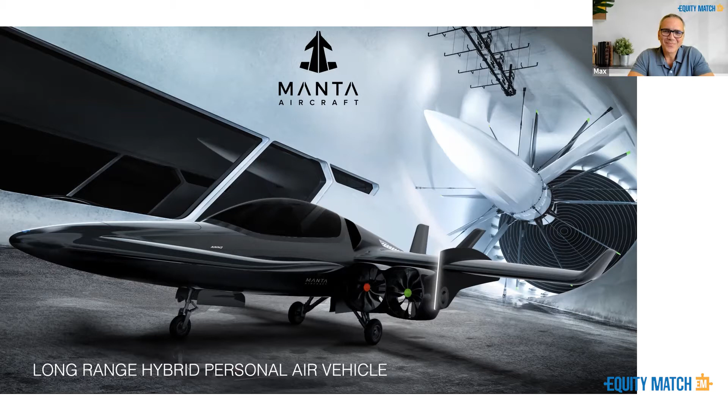Thank you, Lucas. And I don't want to wait and waste even 1 second, so we can start talking about Manta Aircraft. Thanks. So yes, as I was saying, we started from the idea of creating a vehicle for the advanced air mobility. And the advanced air mobility, as you know, it's a new sector.

It's new aviation. The world is changing very fast, and it's bringing the possibility to the people of flying these vehicles or these aircraft that we all have in the back of our mind, because we all have seen the movies of Star Wars, of Fifth Element, of Blade Runner, all these movies where it's possible to start with your own vehicle from the back garden and fly to another place which is right in front of the house of your friend, or go downtown, or go to the seaside and land just close to your place.

So this is becoming a reality. It's very quickly becoming a reality. And this is Manta Aircraft. Manta Aircraft is developing a platform. So we are developing a concept of vehicles like the one that you see on the screen. It's a concept of an aircraft with certain peculiarities that we'll go through now in the presentation.

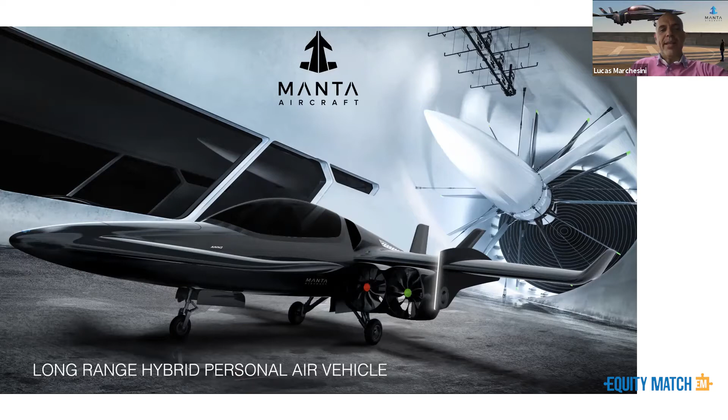So as you might have noticed, the advanced air mobility sector is growing really, really fast. It's enough to say that there are some players which are now valued some billions. Everybody thinks that now this is the sector that can take advantage of the technology that there is around, and put it together and create something really new.

Bring the possibility to fly with this type of vehicle to everyone. So everyone means maybe you will be a passenger. You can fly with this in 2 or 3 years time. You can jump on this and then take off vertically and then land somewhere else very close to your final destination. So the market will be huge.

Every sector analysis says that it's going to grow a lot, and every month that goes by, the sector dimension is estimated to be bigger and bigger. Why? Because there are more and more missions that can be found to be appropriate for these type of vehicles. So these vehicles will be able to do more and more things. The more we develop them, the more we understand how to use them and how practical they can be.

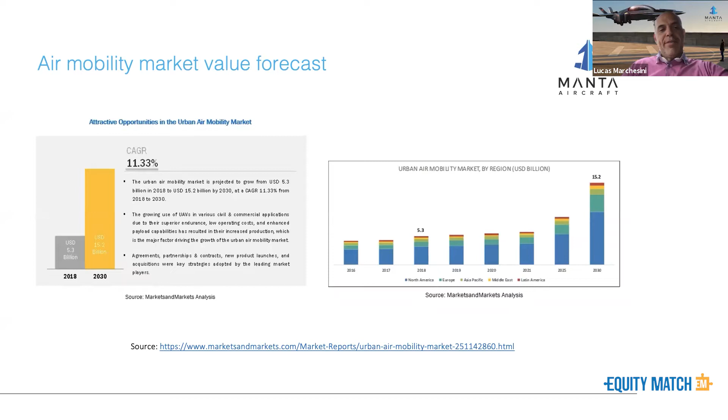There are so many reports saying this, and also quite important people or famous people from aviation are entering this sector. It's enough to say that Muilenburg, the ex-CEO of Boeing, has created a SPAC to acquire an eVTOL company at the beginning of the year.

Tom Enders is now the chairman of the board of directors of Lilium. And Giuseppe Orsi, who was the CEO of AgustaWestland first, which is now most likely the biggest helicopter company in the world, and then he was the CEO of the now called Leonardo, which is the Italian group for aviation, has been caught by Manta, and he has joined Manta.

So what is the design point of Manta? From the beginning, what we decided was to set a certain mission for this vehicle. And the mission is to fly at least 300, better 400 kilometers range, at a speed of 300 kilometers per hour. This is the target we set at the beginning of the design.

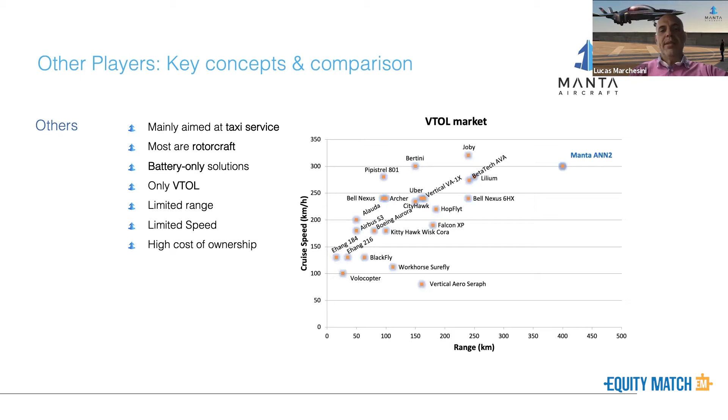Comparing the missions of the other players, Manta has a different mission. It's not better, it's not worse, it's completely different. This range and this speed have implications on the technical solutions that we have adopted.

The solution we have chosen is a hybrid propulsion solution, not battery only. The aircraft is propelled by a gas turbine coupled with a generator, coupled with batteries. The current from these systems is used to power 8 electric motors in the fuselage and under the wings.

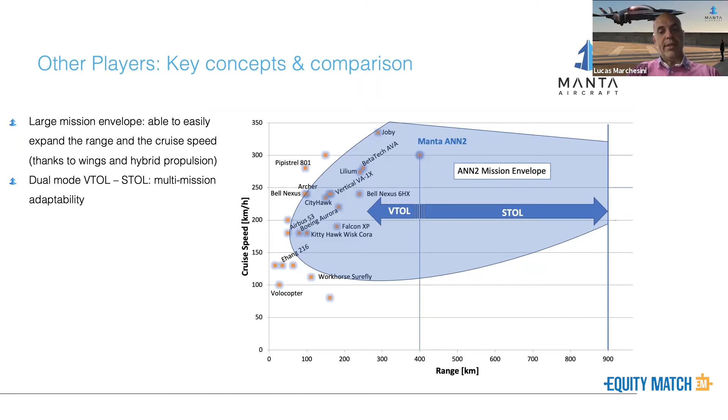With this configuration, the aircraft has a very wide range of operation because it can take off and land vertically, but it can also take off as a normal airplane, increasing a lot the payload. Increasing the payload also means increasing the fuel it can take, expanding a lot the flight envelope or mission envelope of the aircraft. This is illustrated in this graph.

So the aircraft is aimed at fulfilling some missions that today are done by helicopters. The aircraft is not meant to replace helicopters. The Manta vehicles can hover, they are not designed to stay hovering. The helicopter can stay hovering as long as it likes. Manta vehicles are made to take off and land vertically like a helicopter, but then fly like an airplane.

This means they can be used for missions of law enforcement, where you need to perform checks and controls, infrastructure surveillance, offshore transportation, cargo delivery, and so on. This is a typical operation of the aircraft, because it combines the capability of taking off vertically and then flying fast and far away.

In the case of personal transportation, it can be used if you want to fly from one place and land in whatever other place. You can use it instead of a turboprop today, or instead of light helicopters, or for leisure flight, or if you want to set up a limo service, then this is the type of aircraft that might work. We are also developing a 4-seater, more appropriate for this type of service.

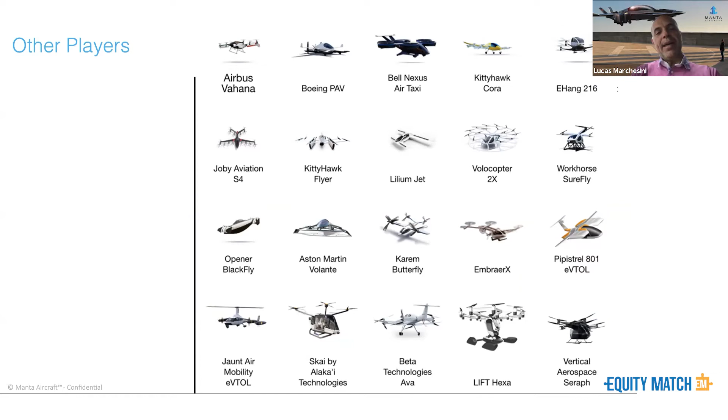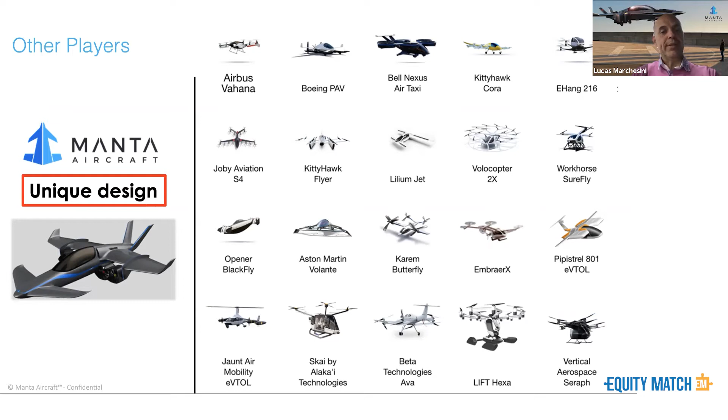This is the panorama, the landscape of some of the other most famous players. Compared to them, the Manta platform has a different design, because as we said, the mission is different. We are targeting a different market — we are not interested in urban air mobility only, but we are targeting regional and inter-regional mobility.

Compared to other initiatives, let's see where we are positioned in terms of status now, or stage of development. We already have a technology demonstrator. It flew in December 2020, a 1/3 scale model, and it has hovered. It still hasn't done the conversion from hovering to horizontal flight.

That's something we have been studying in the simulator, and before doing the real test, we do a lot of simulation and simulator hours. So the whole development is based on simulation and computer aided design.

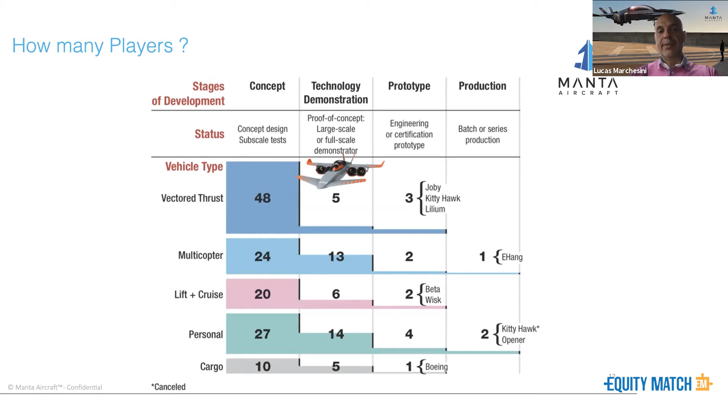And what is the market? You might wonder what's the market — it's not just police missions or transportation of individuals. Well, the market is quite wide. For this type of aircraft, we have seen an interesting market, especially in the US, the biggest aircraft market in the world. Those aircraft which are piston airplanes or turboprop airplanes very often do missions that can be taken over by the Manta platform.

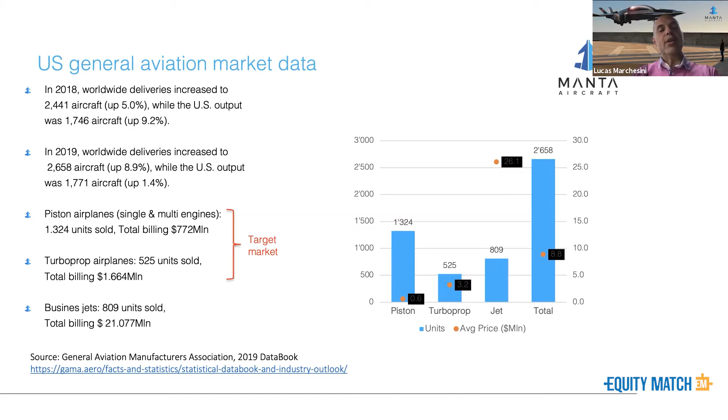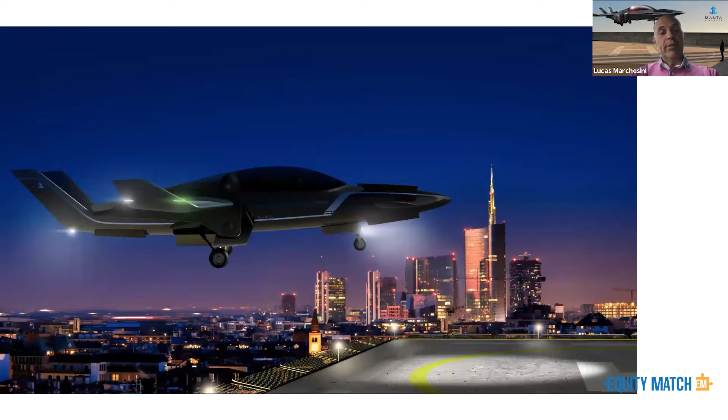So this is the Manta proposal at the end: something that fulfills your wish or your need to move and fly 200 or 300 kilometers or more, depending on the amount of fuel that you want to put on board.

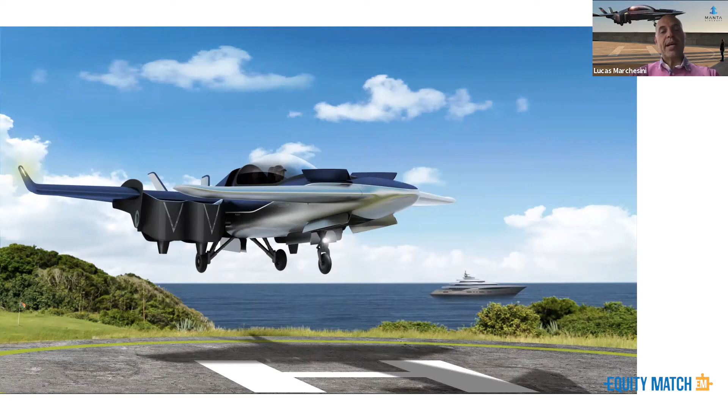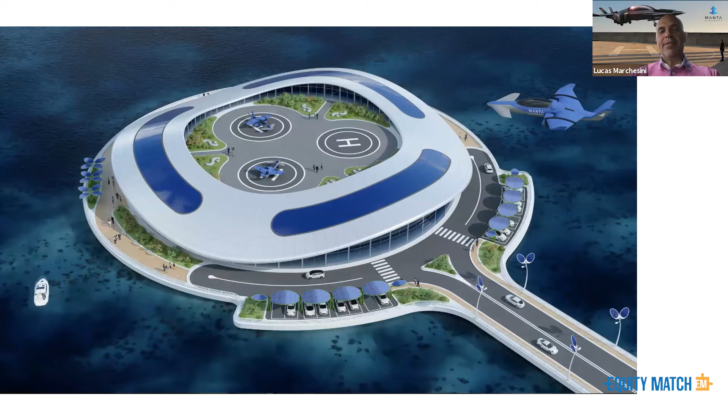So these are some use cases. You can use it to go to the seaside, to the beach house, or it's also designed to be capable of taking off and landing from yachts, and landing close to your place. Interiors are at the level expected for an aircraft used for private flights. And there are already ideas about creating vertiports for this type of aircraft.

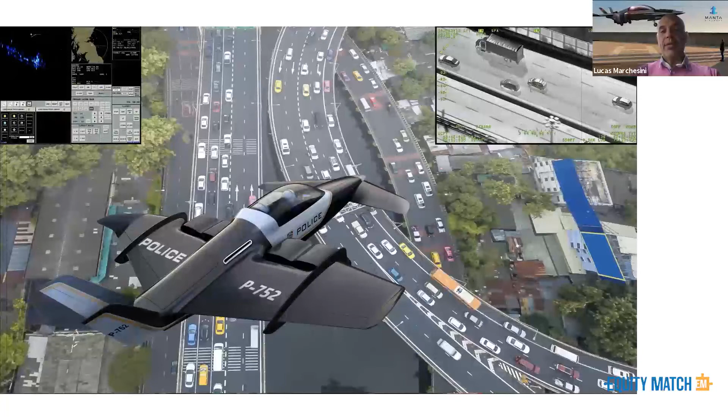But as we mentioned before, it can be used for rapid intervention in case of disaster, in case of medical emergency. It can be used for patrolling. It can be equipped also with sensors. So we are designing the aircraft with the capability of taking on board different types of sensors, which can be used for terrain mapping, surveillance, and so on.

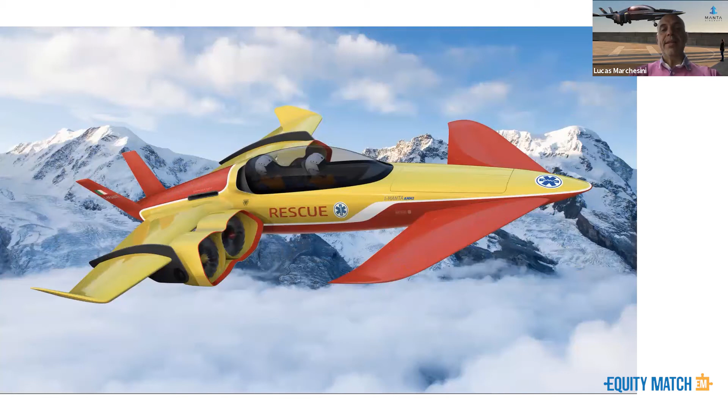And it can be used also for searching, when somebody is missing, or when there is an emergency and an aircraft that is not so expensive to operate can go and search for something. And this is an important aspect, the cost of operation of these aircraft.

Because when we are thinking about an aircraft for passenger transport and travel, we think of a helicopter or an airplane. Forget about airplane jets, which are in a different category. But think about the helicopter, which takes off and lands vertically. The helicopter has a quite important hourly cost and total ownership cost, which is very high. With this aircraft, we are targeting an hourly cost between $200 and $300 per hour.

This means that the cost compared to a helicopter is about one tenth. And this is a big difference. So also using the aircraft for police missions, for search and rescue, for fire control service, for ambulance, this means the cost of the service is much lower than with a helicopter. And this is a big push, obviously.

So which are the main characteristics of this platform? First of all, as we said, it's a hybrid electric propulsion system. There is a gas turbine behind the pilots. The gas turbine in the future can be replaced by a hydrogen engine, or it can be replaced by batteries. There is a whole compartment that can be filled in with batteries.

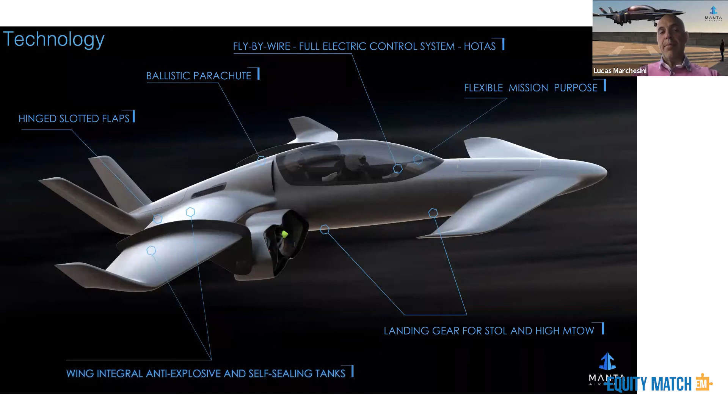And it has the wing tanks for the fuel. They are big wing tanks. So if you want to fly far away, you can fill the tanks, and we have a lot of fuel that can be stored in the wings.

So Manta is developing this platform that can take the shape of a two-seater, a four-seater, or a cargo. It's quite flexible, but at the basis of this, there are four pillars, what we call the technology pillars, that we are focused on. The first one is the design, which is registered.

Then we have the propulsion system, hybrid propulsion system. We are developing a system that will be adaptable to other machines as well, so it could be installed on other machines. This means we are creating an asset that is valuable by itself, which does not need to be linked to the rest of the project. This is also a peculiarity of the Manta approach.

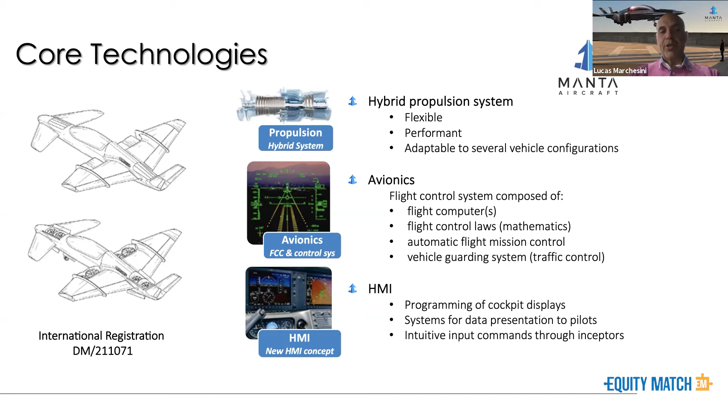Then we have the avionics. So obviously all the flight controls and flight control laws of the aircraft are developed in-house, and they are tuned for these type of vehicles. And then the human-machine interface, meant to be quite easy and user-friendly, so it will be better for the pilots, who will have the possibility to fly these aircraft more easily.

So at the end, it's a multi-purpose platform. It's engineered as a platform with a modular approach, as much as possible, so that we can reconfigure it and upgrade it.

This is meant to offer a longer life cycle. The hybrid propulsion system grants longer endurance and range, with no need for electric recharge infrastructure. This is a big problem for vehicles which only have batteries—they need a recharge station and recharge infrastructure. This type of solution with the hybrid propulsion system does not need ground infrastructure.

You can land close to a fuel station, just fill the tank with diesel, and take off—you don't care about recharging the batteries. The batteries are automatically recharged by the gas turbine. So there's no need for stopping the vehicle to recharge batteries, and no high cost of battery replacement. The batteries are smaller, and we have batteries which last many cycles. This is a new type of battery with this characteristic.

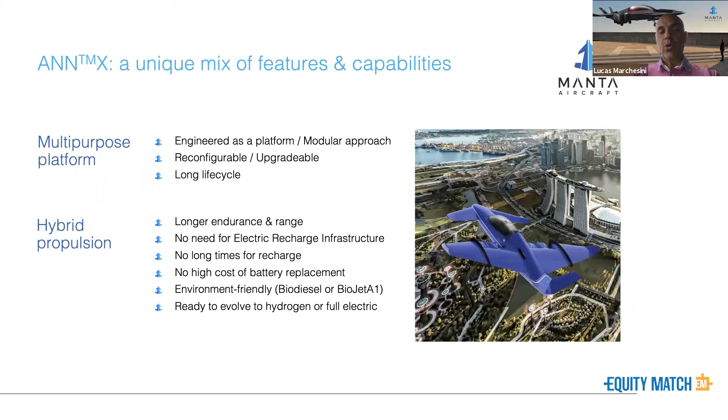It's also environmentally friendly because we use biodiesel and biojet A1. Synthetic fuels are coming too. It's no longer the classical fuels we're used to—they're going to be banned sooner or later, right?

And the capability of taking off and landing vertically means it can take on some missions from the helicopter. It can fly fast as an airplane, and it allows a quite fast time to market, because the configuration of the vehicle is something that is quite known.

We know, and the certification authorities also know, this type of configuration. It's a canard. The Wright brothers in 1903 flew with a canard—this is the first configuration that has ever flown. So this plays in favor of de-risking the project and shortening the time to market, because we think it will...

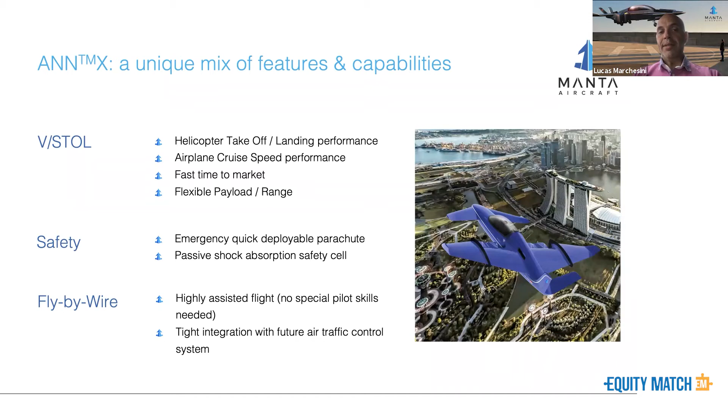It has safety features like the deployable ballistic parachute, energy absorption structure, and the aircraft is full fly-by-wire. It means it's controlled by a computer. The pilot gives inputs, but the aircraft is prepared for the future to fly by itself, when it will be allowed to fly with passengers on board in automatic mode.

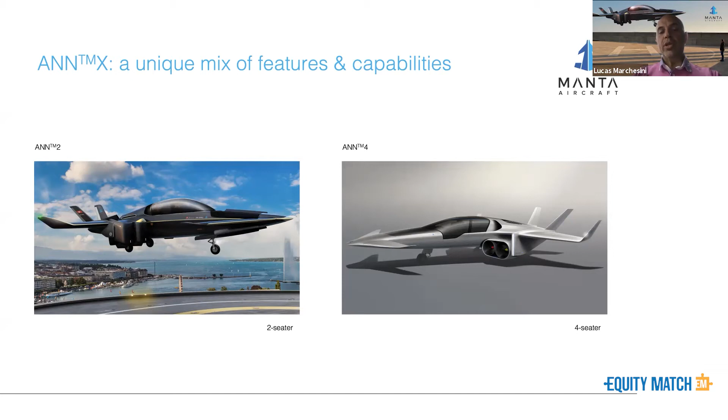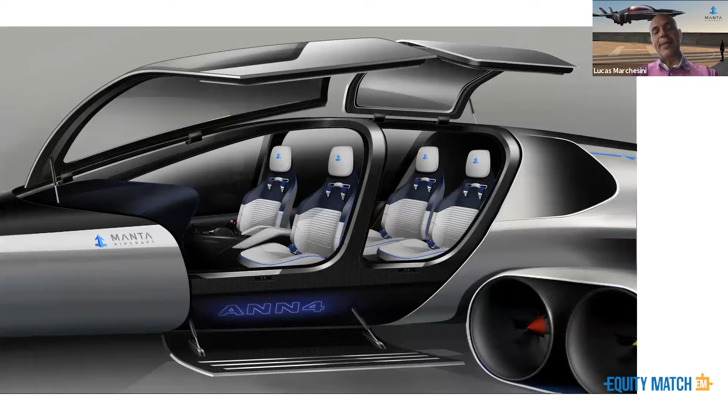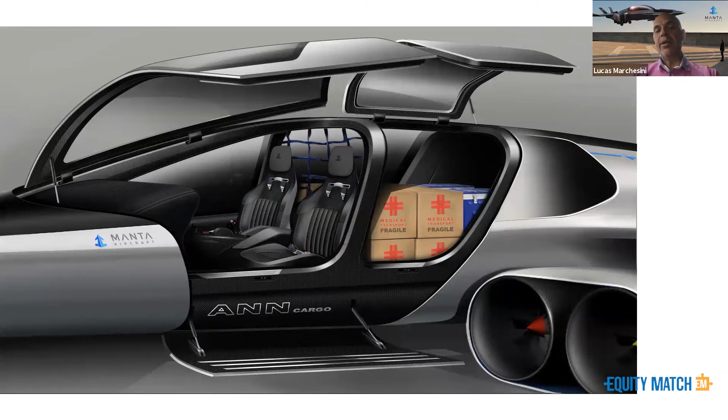You see here the first aircraft we are developing is the two-seater, but we are already thinking, and we have in the background the four-seater coming. This is just an overview, a rendering of the four-seater, the combi, right? It will be like a combi or a car that you can adapt, and decide how it better suits your needs from time to time.

Just an idea about the price, because everybody asks as a second question, what's the price of this aircraft? Well, that's normal, it's clear.

We think the price will be around 1.5 million euros for the two-seater, and the four-seater would be slightly more expensive. For the special missions version, it depends on the configuration requested by the customer, so it will go up to 2.5 million.

But anyway, the direct comparison for this price is the equivalent helicopter that can fly at 300 kilometers per hour for 300 kilometers. If you want such a helicopter, you will not spend less than this—actually you will spend maybe double this or more.

So who is behind this project? This is another peculiarity of Manta Aircraft—we are a small group. We have decided to form a group with all professionals who have at least 20-25 years of experience. So it's a small group with very skilled professionals.

We have some junior engineers—there are now 3 junior engineers, and all the others are very skilled professionals. This is also, as I was saying, a peculiarity of Manta, which allows it to be very fast in developing the whole project.

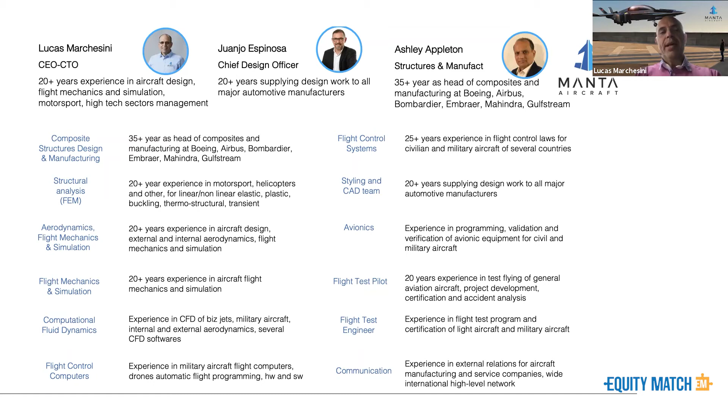If you think that we started at the beginning of 2020, and by December 2020 we had made the 1/3 scale model fly, it means we had already designed the layout of the aircraft by that time. And then we carried on during 2021.

This is an overview of the timing of this enterprise. At the end of 2020, we had the rollout and first flight of the 1/3 scale model. Mid 2021, we had the design freeze—we went to the wind tunnel and verified that the design we had done was proper, with no glitches.

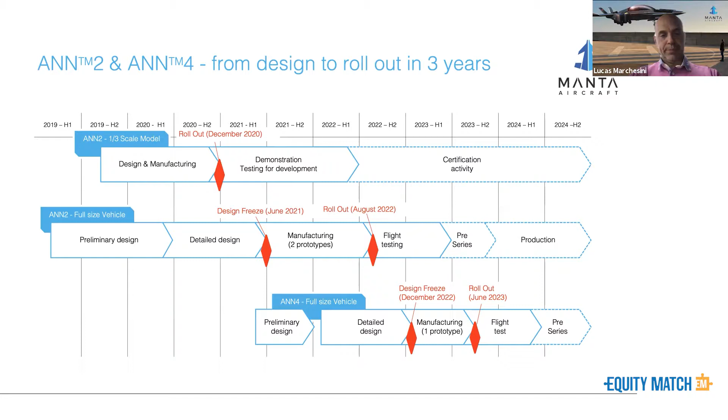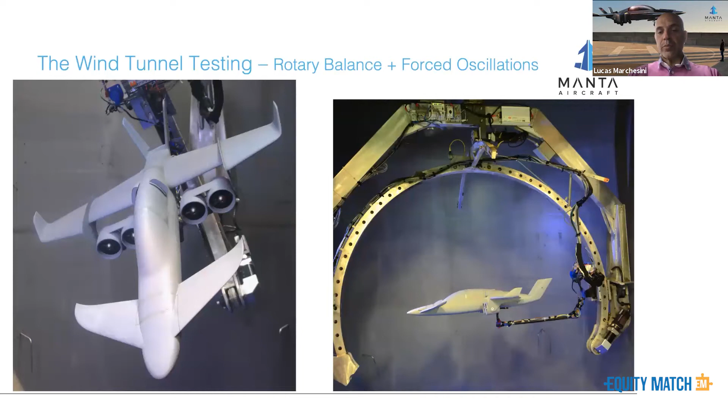Just a quick note before closing this talk is about what we think for manufacturing. We have identified some suppliers already, identified clearly which materials we want to use, what tooling to use, and so on. We have identified different technologies to apply in this aircraft. There are some new technologies, but mostly we try to stick to what is known and proven.

So we introduce advancements in the 4 areas we mentioned: the design, the hybrid propulsion system, the flight control laws, and the human-machine interface. For the rest, we try to stay on what's already on the shelves and what is already established and verified. This is to reduce the risk of the project and to reduce as much as possible the time to market.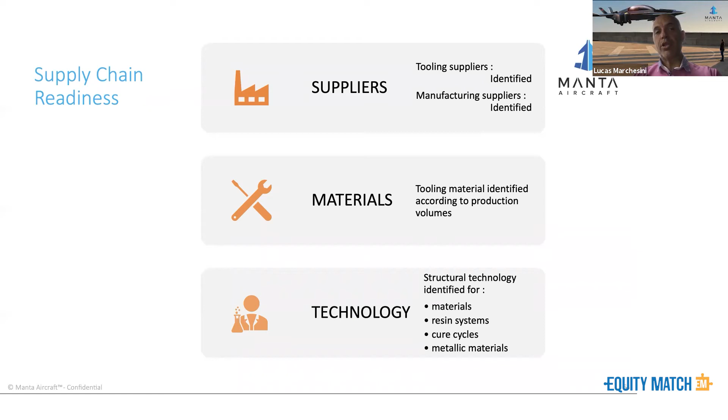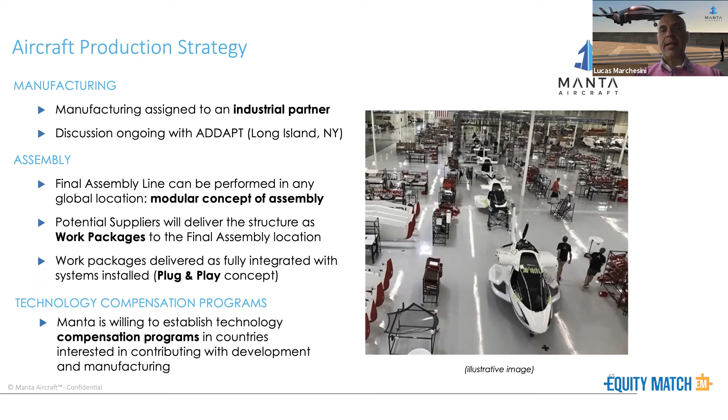So the production strategy is thought to be modular. It means we design the aircraft in modules, and they can be assembled all together after coming from the suppliers. This is a typical automotive approach with a plug and play concept, and it also allows a much easier technology compensation program. So if a country wants to contribute or have its own factory, they can start creating some modules, and then assemble depending on the technology level they have.

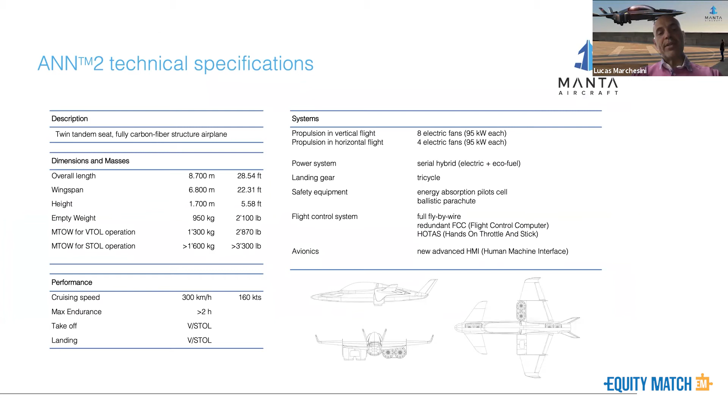I think it's quite an interesting concept, and in the news we have seen some articles coming out presenting the aircraft. Here are some specs of the aircraft. If anybody is interested, we can go deeper into these numbers.

During the project, we are creating some assets, and we have 3 main milestones from now till the end of next year. One is in October, right now. At this time, we have created these assets, meaning they are already a value that is available. This also goes in the direction of de-risking the program. At these milestones, we create assets that have an intrinsic value, regardless of being inserted in the rest of the program.

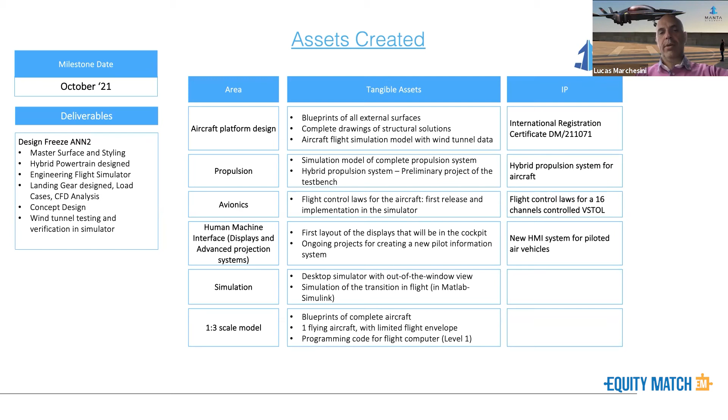In December this year, we will complete the drawings of the aircraft and the propulsion system. We have a test bench ongoing, so the development will continue and be finished at the beginning of next year. Also for the human-machine interface and avionics, the simulator will be richer than it is now.

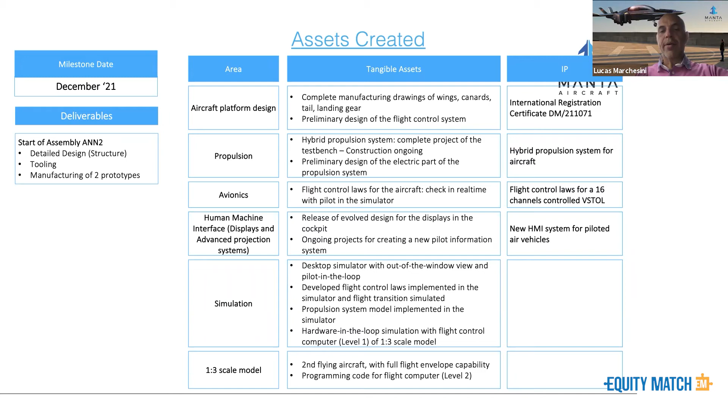In April next year, we'll have everything completed from the manufacturing point of view for the prototypes. We'll have the hybrid propulsion system test bench completed. The avionics will reach a level which allows us to fly in automatic way the complete mission of the aircraft with the 1/3 scale model, and start testing this programming for the future flight of the 1-to-1 scale.

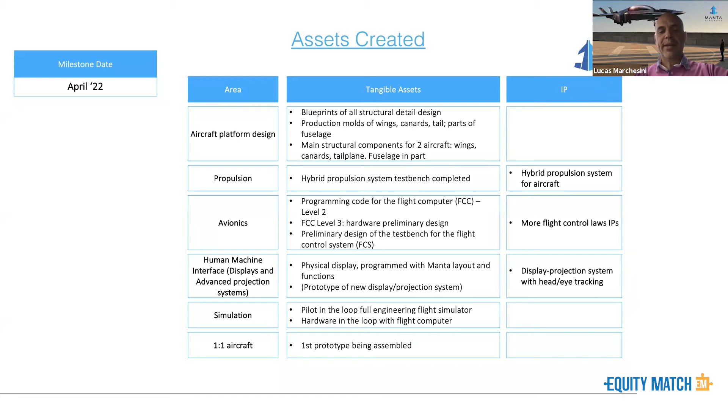The same for the simulation, we'll have a full pilot-in-the-loop simulator. So whoever wants to have a go and try to fly the aircraft can sit in the simulator and see what it means to fly this type of aircraft. The simulators in the future will be used for training. So these are the assets we are generating, and we are waiting for the future to come.

Thanks, Lucas. Extremely fascinating. Let's jump into the future, but it's not that far away—actually just after tomorrow, let me say. I mean, we have been covering everything, so I don't want to dwell on what you already talked about very clearly. Let me ask you, you had 2 business models, okay?

One is retailer and one is more related to business and probably even states. Where do you think you can profit the most in the coming years when Manta will be fully operating? Well, for sure, the biggest market for this type of vehicle is North America, in the States, and there are so many aircraft used in the general aviation sector. Just enough to say that in the US there are more than 212,000 general aviation aircraft. So just take away the business jets and the big helicopters, and you have more than 170,000 aircraft there.

This is a big market with a sales volume each year equivalent to between 1 and 1.5% of the whole number of aircraft. So there are many aircraft sold in that market, and that's where we would like to position these platforms, the 2-seater and the 4-seater.